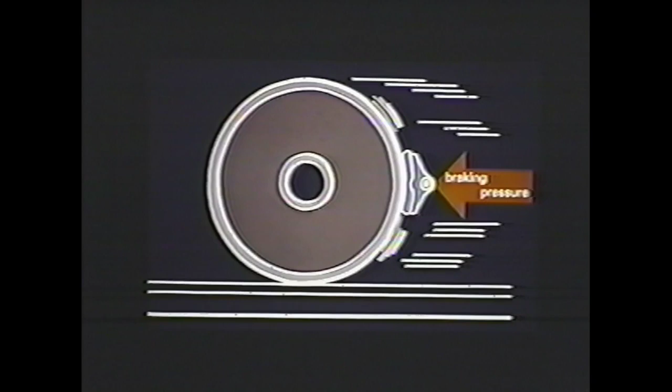Let's begin with the final result, the action that causes the wheel to slow down or stop. The most common method is to force a brake shoe against the rotating wheel at varying pressures.

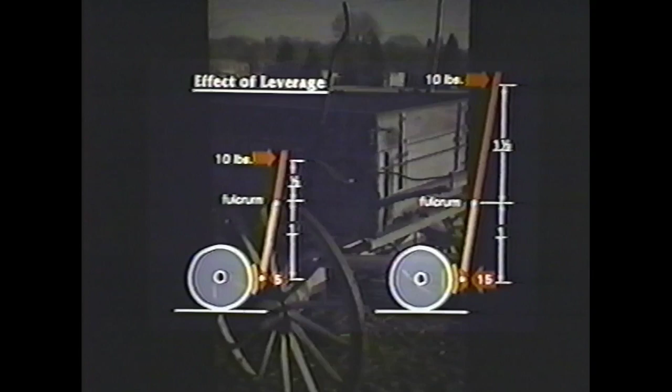During pioneer days, brakes were operated manually by a simple lever. When force was exerted at the top of the lever, the shoe at the bottom was pressed against the wheel. Notice that moving the fulcrum point or changing the length of either end of the lever affects the pressure on the wheel.

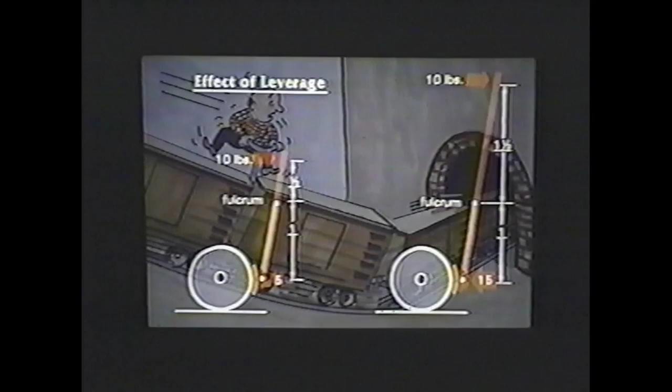In the early days of railroading, train brakes were applied by hand. When the engineer wished to slow the train, he blew a signal with the engine whistle. The brakeman, hearing this signal, would go from car to car, over the top, applying hand brakes. Another whistle signal told them to release the brakes.

In the late 1860s, George Westinghouse devised a way of forcing the brake shoe against a wheel by using air pressure. The air pressure acted against a piston that moved inside a cylinder. The piston movement was then transmitted through a rod and levers to the brake shoe.

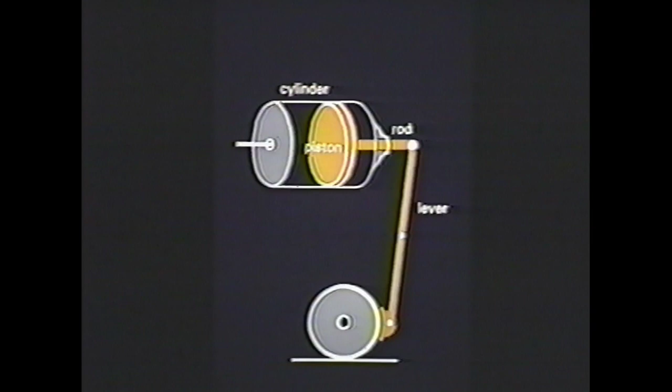George found that he could increase the brake force not only by levers, but also by increasing the piston area. If he doubled or tripled the area of a piston, he could double or triple the force on the brake shoe.

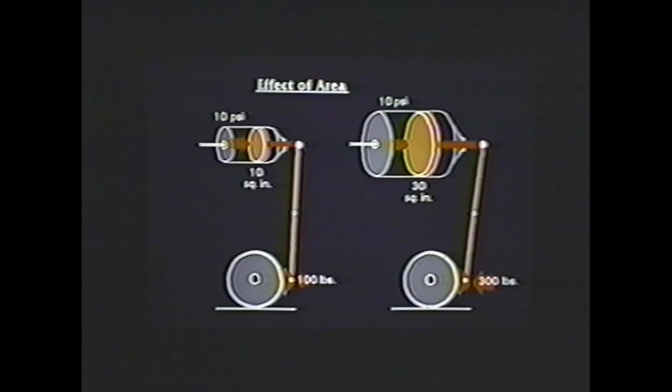This is caused by the fact that air pressure is exerted equally against every square inch of the piston surface. Increasing the number of square inches will increase the total force. We always state the amount of pressure in pounds per square inch, or PSI, instead of trying to determine the total force.

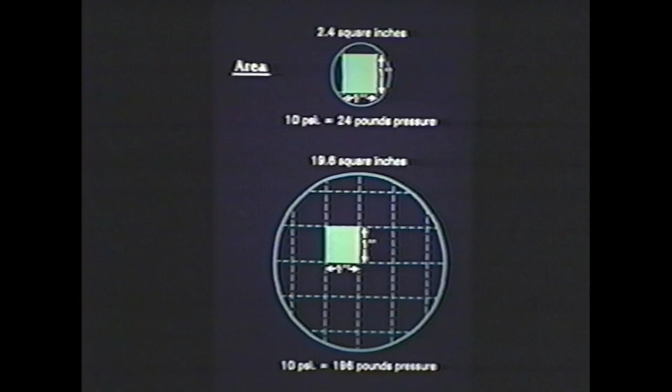George Westinghouse used these principles to build a train air brake system. He installed a steam-driven air compressor on a steam locomotive and connected it to a large tank or reservoir which held a supply of compressed air. He then connected the reservoir to a valve located at the engineer's position.

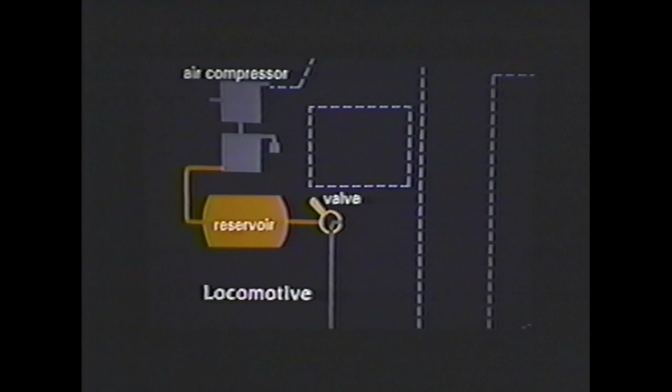When the engineer wanted to slow the train, he would pull back on the valve handle. This would allow air pressure to flow from the reservoir into a brake pipe. The brake pipe was connected to each car in the train through cocks, flexible hoses, and couplings. A branch pipe connected the brake pipe to a cylinder on each car.

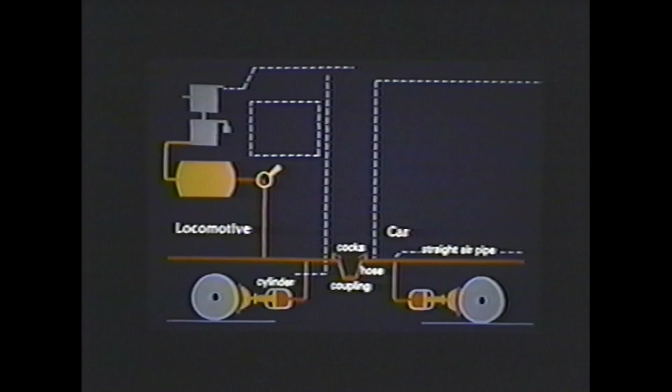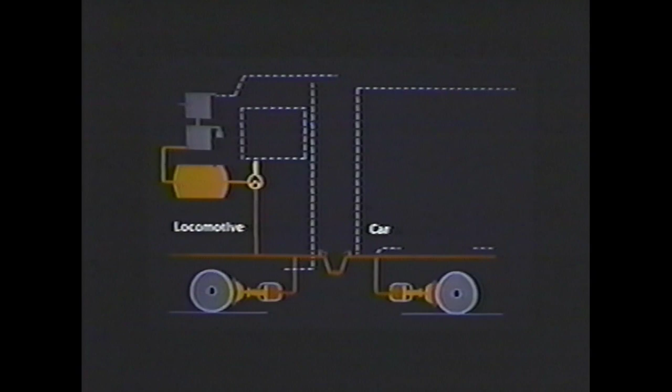When the engineer felt the braking force was sufficient, he would move the handle forward until the valve was closed or lapped. This held air pressure in the cylinders and kept the brake shoes against the wheels. To release the brakes, he pushed the valve handle all the way forward. This opened the brake pipe so that pressure could escape from the system.

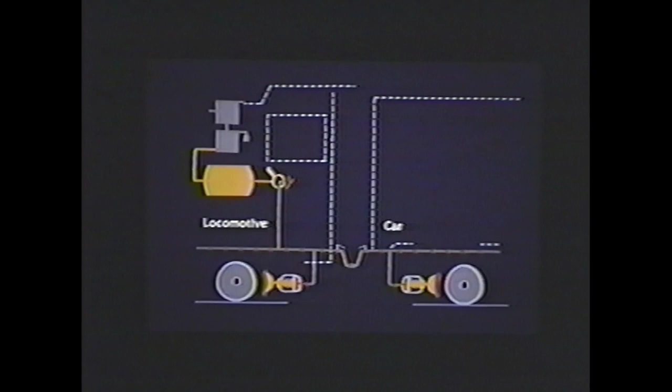When the air pressure was released from the cylinders, a light spring would push the pistons back, pulling the brake shoes away from the wheels. This system proved to be a big improvement over the use of hand brakes.

However, it wasn't long before a train separated. An air hose burst, or maybe the brake pipe was broken. Guess what happened then? No brakes.

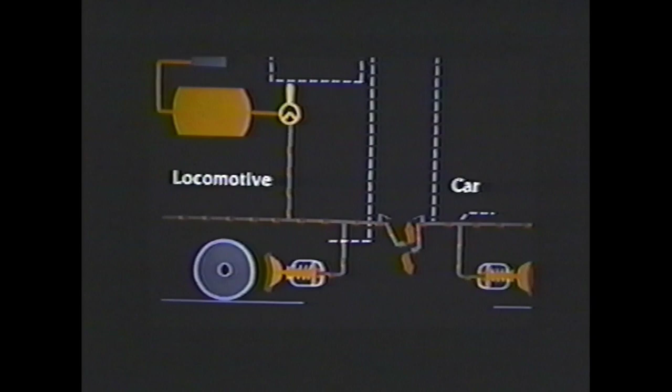Undaunted, George went back to the drawing board. In the early 1870s, he came up with a fail-safe system. By reversing the direction of airflow in the brake pipe, the brakes would apply automatically if the pressure should escape.

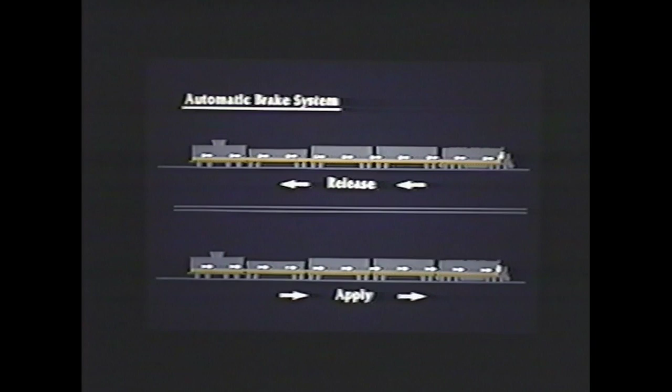This meant putting pressure into the brake pipe to release the brakes and taking pressure out of the brake pipe to apply the brakes.

In order for this system to work, George had to provide each car with its own supply of air pressure. So he placed a separate reservoir on each car, which was auxiliary to the reservoir on the locomotive. Then he designed a valve for the car, which would control the charging of the reservoir, applying the brakes and releasing the brakes.

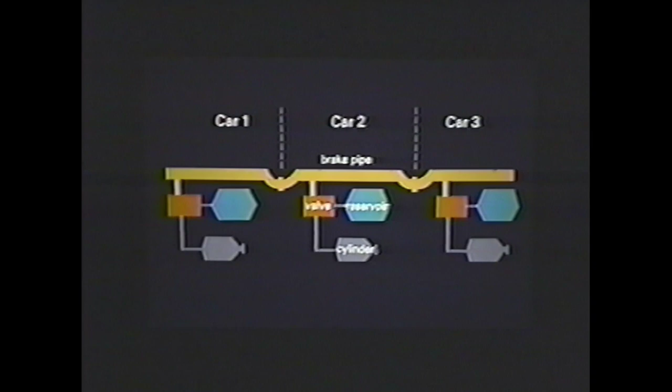The valve was the heart of the car brake system. On command from the brake pipe, it would perform these three distinct functions: charge, apply, and release. Because of this triple duty, the valve became known as a triple valve.

If we learn how the triple valve works, it will reveal the basic operation of today's complex control valves. Although many additions and refinements have been made, the principle remains the same. This knowledge can be helpful in avoiding pitfalls and solving many air brake problems.

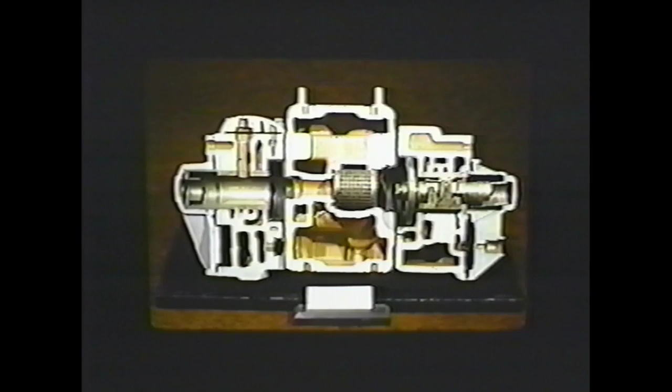The early triple valve was made up of a piston that moved back and forth in a cylinder. The piston had a stem attached to one side that moved a brass block, called a slide valve. As the slide valve was moved, it opened or closed connections to control airflow.

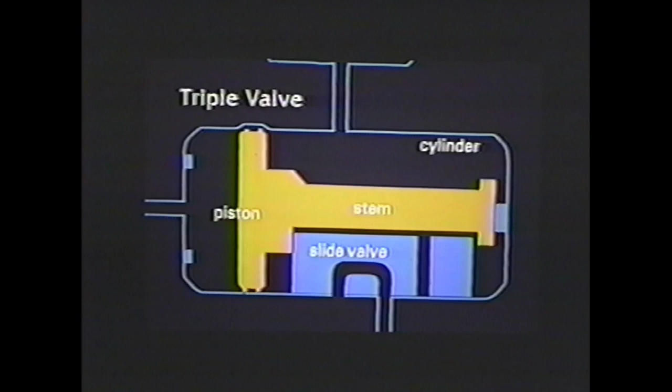The chamber to the left of the piston is connected to the brake pipe. As pressure enters from the brake pipe, the piston is pushed to the right, moving the slide valve.

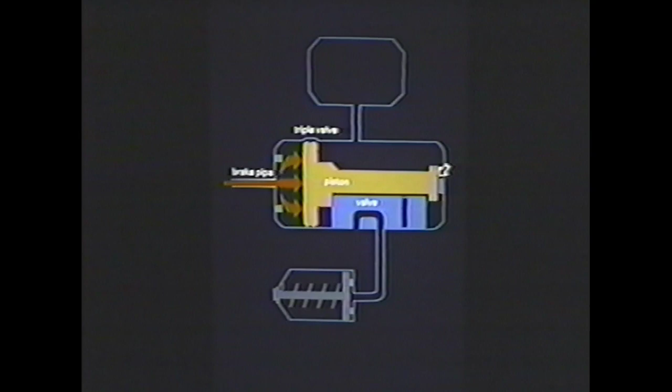When the piston is pushed to the right as far as it will go, a small passage called a charging port is uncovered above the piston.

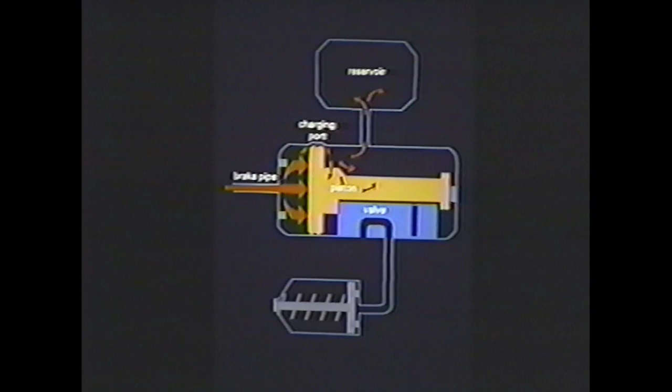Air pressure from the brake pipe can squeeze through the charging port to the other side. The pressure then begins to build up slowly around the slide valve and up into the auxiliary reservoir. Air pressure will continue to flow through the charging port as long as brake pipe pressure is higher than pressure on the other side. Because of the small opening, it will take about 7 or 8 minutes to build up to that in the brake pipe.

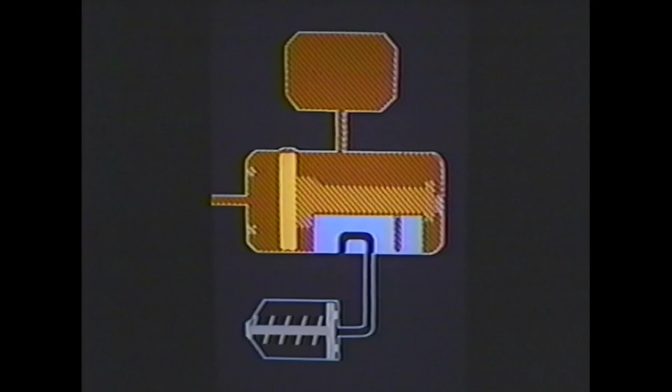When pressures are equal, the system is fully charged. Let's charge this system to 80 pounds. If we maintain 80 pounds pressure in the brake pipe, it will slowly build up to 80 pounds around the slide valve and in the auxiliary reservoir. Now we can apply the brake by reducing pressure in the brake pipe.

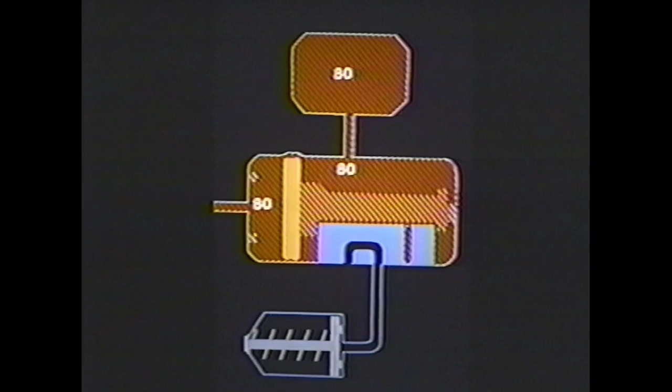Suppose that we reduce brake pipe pressure 10 pounds, from 80 to 70. As pressure begins to drop on the brake pipe side, the piston will start moving to the left. This movement is caused by higher pressure pushing against the right side. The charging port is so small that pressure cannot flow back through it as fast as brake pipe pressure is being reduced, and the first movement will close off the port.

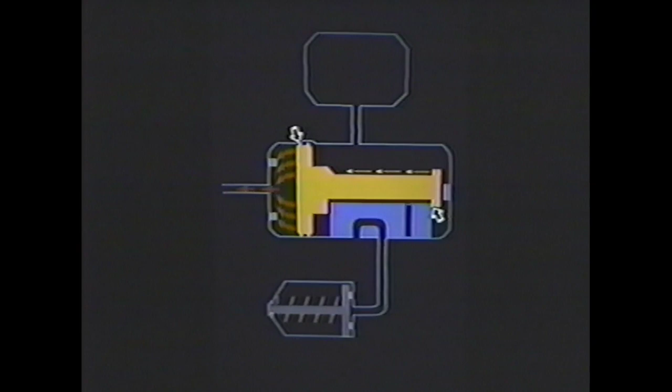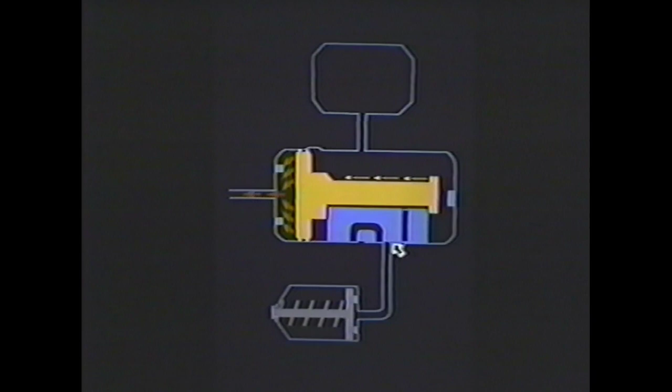As the piston moves further, the slide valve is pulled along to close the exhaust opening from the brake cylinder, shown by the arrow. With reduced brake pipe pressure, the piston continues to move all the way to the left. In this position, the hole drilled through the slide valve will line up with the pipe connected to the brake cylinder. Now, air pressure from the reservoir and around the slide valve can flow down to the brake cylinder to apply the brake.

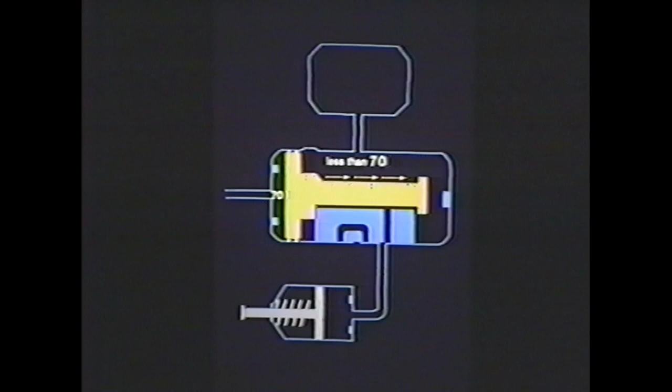As air pressure flows from the auxiliary reservoir to the brake cylinder, reservoir pressure is reducing. This flow will continue until the reservoir pressure is slightly below the 70 pounds remaining in the brake pipe. When the reservoir pressure is slightly lower than brake pipe, the piston will move toward the lower pressure, or toward the right. This movement continues until the slide valve is moved far enough to close the opening to the brake cylinder. When all ports are closed, the valve is said to be lapped, and the brakes will be held applied.

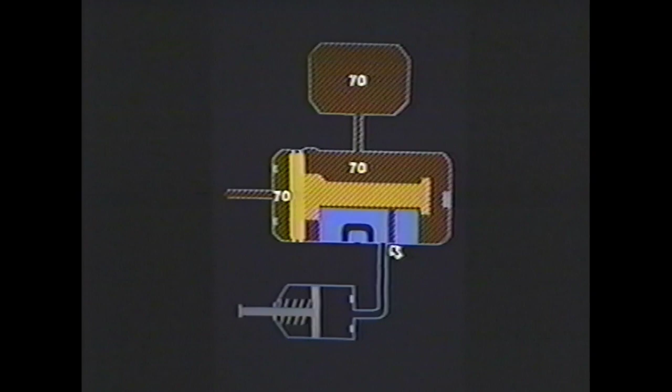If we wish to apply the brake harder, we can make a further reduction in brake pipe pressure. Each reduction causes the piston and slide valve to move, opening the port to allow more reservoir pressure to flow to the brake cylinder. In this way, we can apply the brake in small steps or graduations.

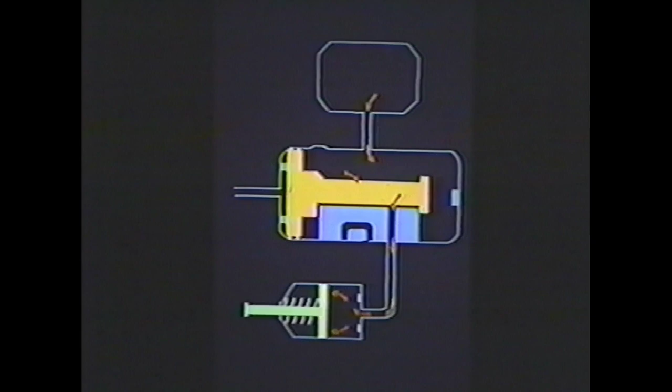To release the brake, we must increase brake pipe pressure. When the pressure on the brake pipe side of the piston becomes greater than that remaining on the reservoir side, the piston and slide valve will move toward the right. Now, all air pressure in the brake cylinder will exhaust through the slide valve, and the return spring will return the brake cylinder piston to release.

One thing you should note here: once the valve moves to release, all brake cylinder pressure will be released. The brake cannot be released in steps or graduations.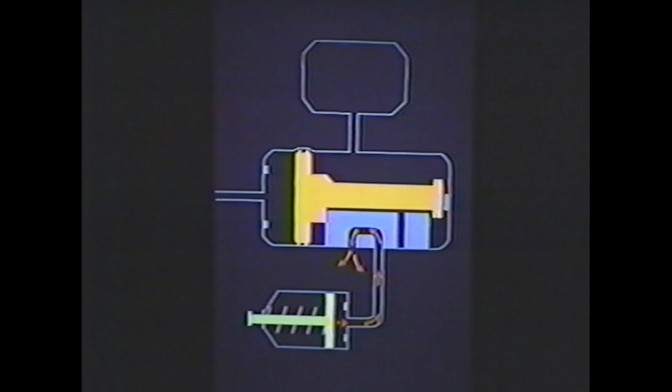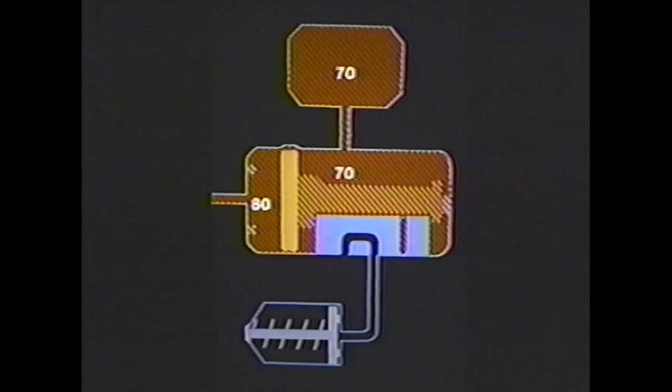Another important fact to remember: brake pipe pressure will increase quite rapidly, but auxiliary reservoir pressure will increase very slowly. Here we see that brake pipe pressure already has reached 80 pounds, but reservoir pressure has only recharged to about 70 pounds. If it were necessary to apply the brake again at this point, we would get no brake cylinder pressure until after brake pipe was reduced more than 10 pounds.

This is the fundamental principle of train air brakes. The brakes will release when brake pipe pressure is above auxiliary reservoir pressure. The brakes will apply when brake pipe pressure is below auxiliary reservoir pressure. This principle can help you understand and solve many air brake problems.

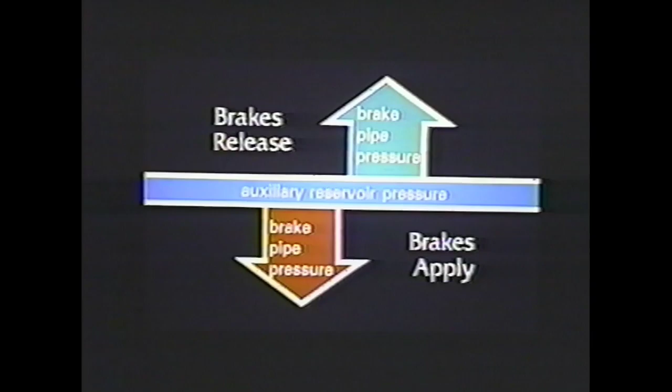There are two methods by which the valve can be moved to release position: either increase brake pipe pressure or reduce auxiliary reservoir pressure. All control valves are now equipped with a reservoir release valve. By pulling part way out on the rod, reservoir pressure will be reduced and the brake will release.

Up to this point, we have not discussed the pressure developed in the brake cylinder when the brake is applied. To understand this, we must first learn a few facts about the brake cylinder.

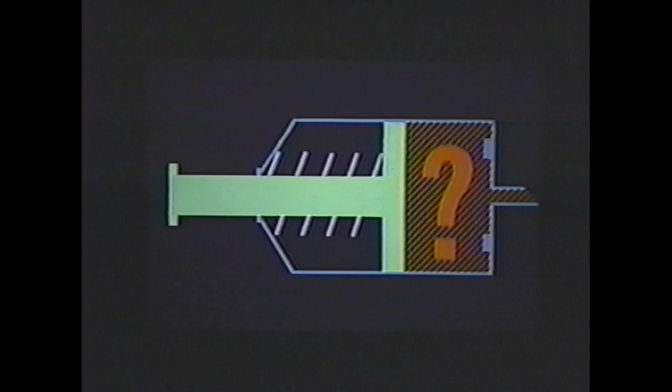When there is no air pressure in the cylinder, the piston and rod are held to the right by a light spring called a return spring. The action of the return spring pulls the brake shoes away from the wheels when the brake is released.

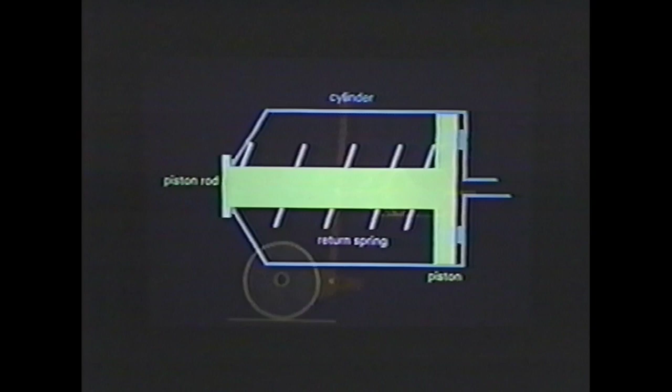When the brake is applied, air pressure enters the cylinder and soon overcomes the spring. The piston and rod move toward the left until all brake shoes are up tight against the wheels. The length of movement will depend on brake shoe wear and condition of the levers and pins.

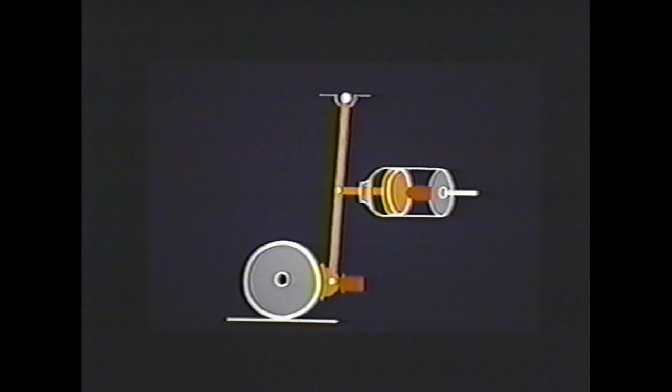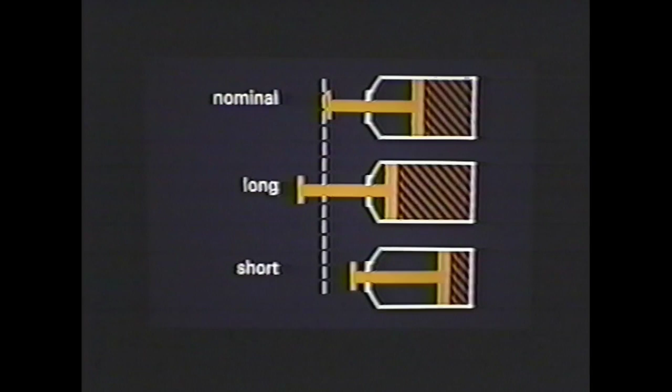Brake cylinders are given a nominal piston travel, the point where the piston should be when the brake is fully applied. This point determines the space or volume that must be filled with air pressure. If the piston travel is longer than nominal, the volume will be larger. If the piston travel is shorter, the volume will be smaller.

When the piston is at its nominal travel, the volume in the auxiliary reservoir is just 2½ times larger than the volume in the brake cylinder. This 2½ to 1 ratio can be used to determine the brake cylinder pressure.

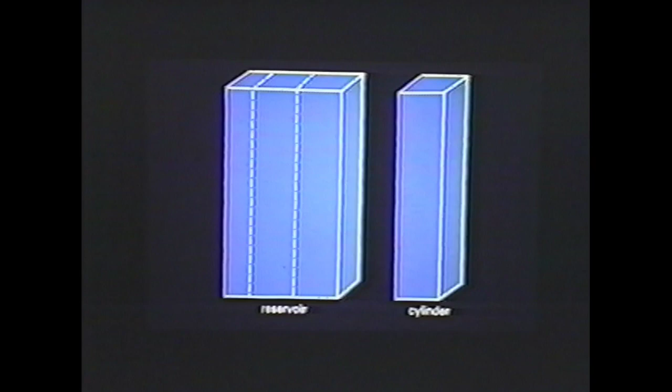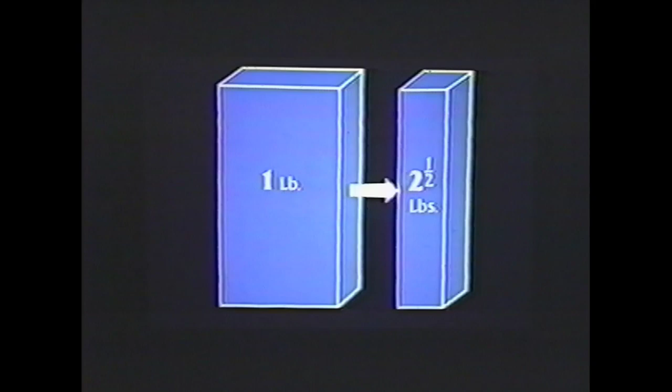We found earlier that for each pound of brake pipe reduction, a pound of pressure would flow from the auxiliary reservoir to the cylinder. Now we shall see that each pound of pressure from the reservoir becomes 2½ pounds in the brake cylinder. This can be seen more clearly by using two water tanks.

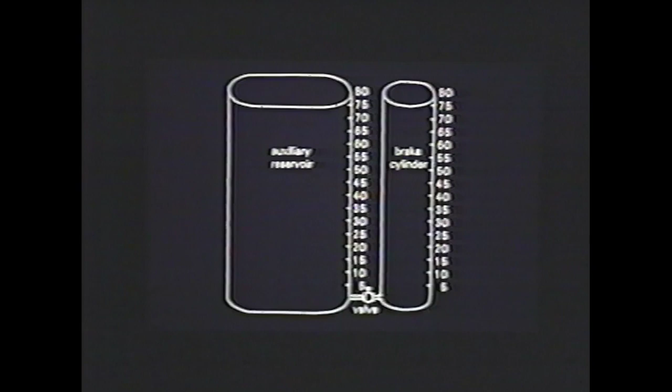The larger tank represents the auxiliary reservoir. The smaller tank represents the brake cylinder. Each is 80 inches high. Now suppose we connect the two tanks at the bottom through a valve, and the valve is closed. Let's begin with the large tank filled to the top, indicating that the reservoir is fully charged. The small tank is empty, indicating that the brake is released.

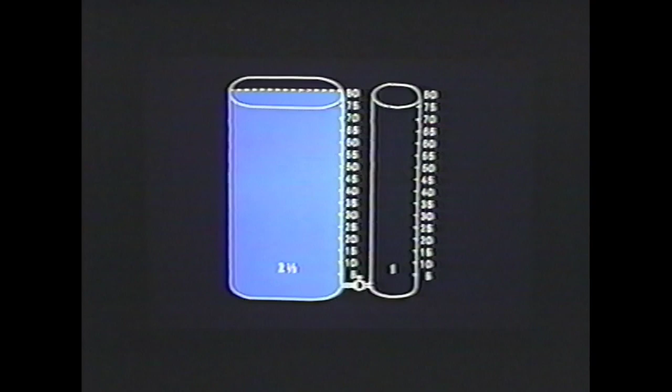If we open the valve between the tanks, water will flow from the large tank to the small tank. As the water level drops down in the large tank, it comes up in the small tank. Let's close the valve when the water level has dropped 10 inches in the reservoir. Now we can see it has risen 25 inches in the cylinder because of the 2½ to 1 difference in volume.

Each time we open the valve, water level drops in the reservoir and rises in the cylinder. There will be 2½ inches added to the cylinder for each inch of drop in the reservoir. Here we see that the reservoir has fallen to 60 inches and the cylinder has risen to 50 inches.

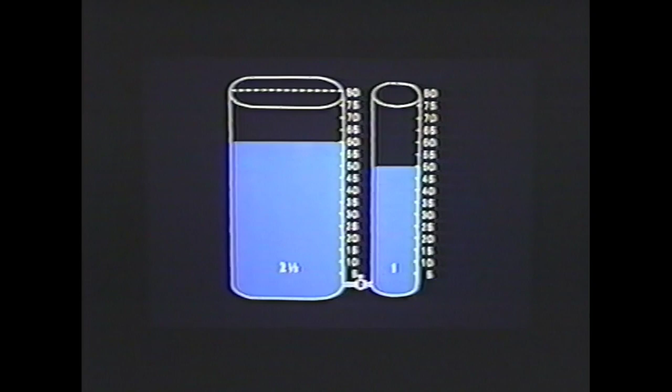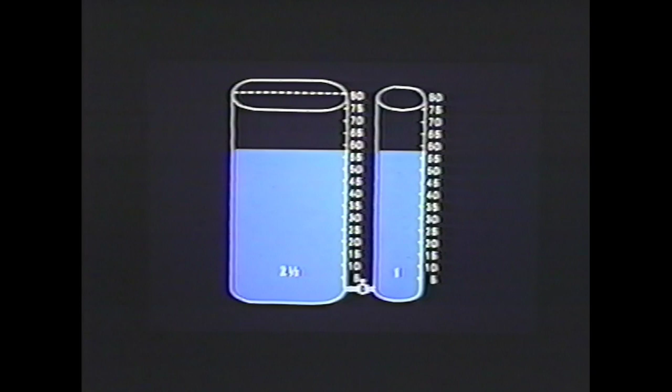This brings us to another important fact. What would happen if the valve were left open? When the reservoir drops to about 57 inches, the cylinder will increase to about 57 and the levels will be equal. No more water will flow between the tanks. This point is called equalization. Equalization is the point at which reservoir and cylinder are at the same level.

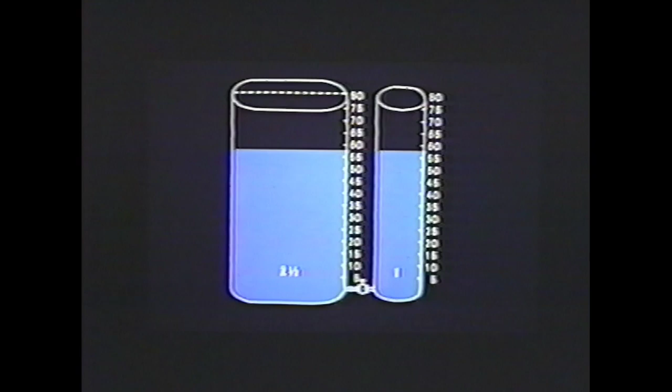In air brakes, equalization is the highest amount of braking that can be obtained during a normal application. This is true because only one reservoir, the auxiliary reservoir, is used normally.

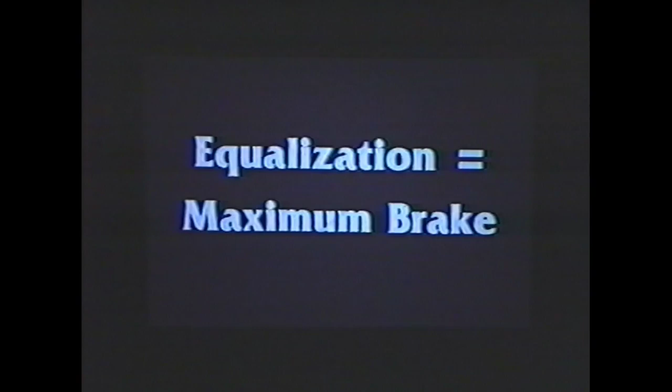To get stopped quicker in an emergency, a second reservoir had to be added to each car. The second reservoir, called an emergency reservoir, is charged in the same manner and to the same pressure. However, it is not used during normal braking.

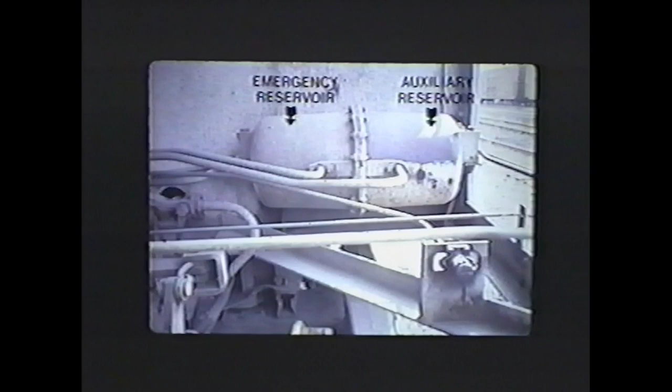When an emergency stop is required, both reservoirs, auxiliary and emergency, are equalized with the brake cylinder, providing a 20% increase in brake cylinder pressure.

The control valve must now be able to recognize a normal application from an emergency application. Since the pressure must be reduced in the brake pipe to cause an application, somehow the reduction will have to signal for either a normal or emergency application.

The solution was to devise an additional valve that would respond only when emergency applications were needed. Normally, the engineer exhausts air pressure from the brake pipe slowly. But in an emergency, he exhausts the pressure rapidly. The valve designed to make this distinction was called a quick action valve.

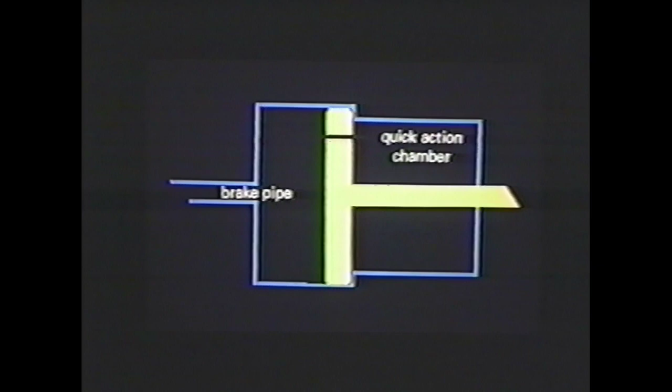Its operation depended on air pressure flowing through a small hole or choke, shown here in the piston. The quick action valve is charged similar to the triple valve. But when brake pipe pressure is reduced at a normal rate, the pressure flows right back through the hole, and the piston does not move.

However, if the brake pipe pressure is reduced rapidly, pressure cannot get through the hole as quickly as the brake pipe is reducing, and the piston will be moved to the left.

The piston movement will cause several things to happen. First, it will open a vent valve to dump all air pressure out of the brake pipe. Second, it will connect the emergency reservoir to the auxiliary and brake cylinder, raising cylinder pressure about 20%.

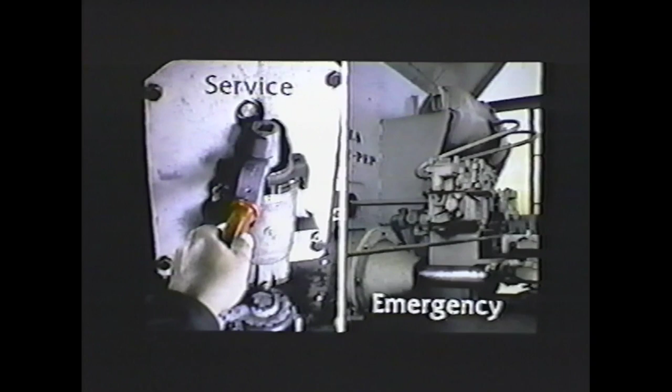If the small choke becomes clogged, air pressure cannot reduce in the chamber at the same rate as brake pipe. This can cause brakes to apply in an emergency when a normal or service reduction is made. This condition is often referred to as a kicker or dynamiter.

Remember, it's not the amount of air taken out of the brake pipe that triggers an emergency. It's the rate at which air pressure is reduced. That's why train brakes can be put into emergency when opening an angle cock too quickly.

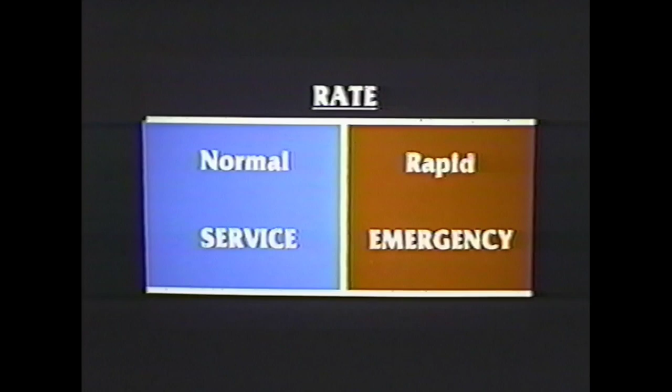After an emergency application, the brake pipe cannot be recharged, nor can the brakes be released until all vent valves have closed. This usually takes about 90 seconds.

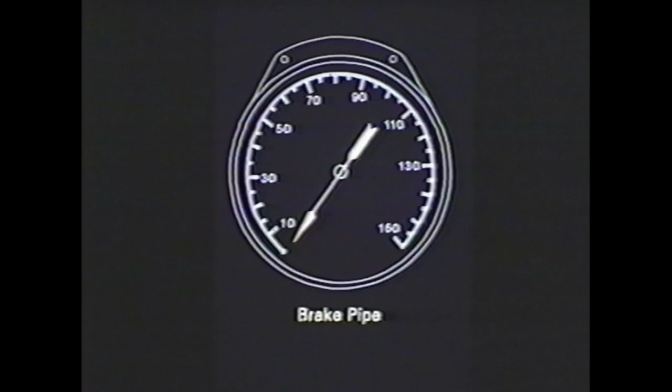Modern control valves, now called AB valves, have many improvements over the old triple valves. The service and emergency portions have been separated to improve stability. Features have been added to transmit both application and release of brakes more rapidly throughout the train.

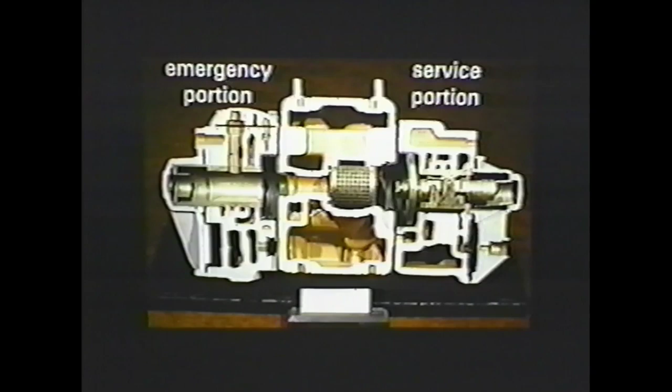One such feature is called quick service. The quick service feature makes a small reduction in brake pipe pressure at each control valve when a service application is first started. It helps to transmit or propagate the application throughout a long train, and it ensures that each car in turn will have the brakes applied once an application is started.

Improvements were made in the original AB valves, and they became ABD valves. A feature added to the ABD valve is the accelerated service release. This feature causes a faster release of service applications by allowing the unused emergency reservoir pressure to help build up brake pipe pressure.

Now, when brake pipe pressure is increased only a pound or so on the first car, the valve will assist in building up brake pipe pressure so that the next car will release and each car in turn adds air to the brake pipe.

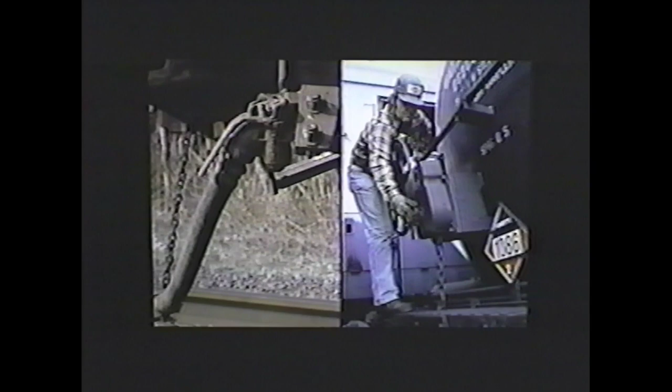This feature has caused the brakes to release on a few standing drafts of cars, resulting in runaways. To avoid such consequences, it is important that the brake pipe be completely depleted and an angle cock be left open on any drafts that are not attached to a locomotive. If this is not done, the cars should be secured with hand brakes.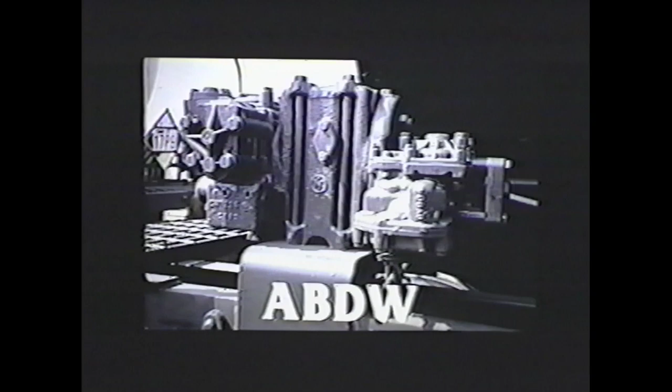The most recent control valve is called an ABDW. This valve has an accelerated service feature, which causes service applications to travel faster throughout the train. It is similar to the quick service feature, but acts continuously whenever brake pipe pressure is being reduced.

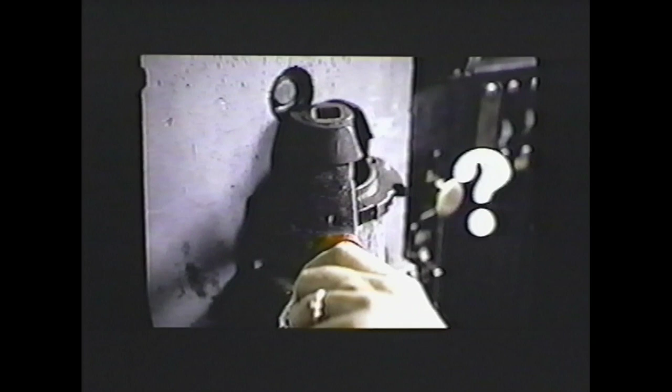The presence of ABDW valves in a train will cause a shorter brake pipe exhaust when making service reductions. An engineer can easily mistake this for a closed angle cock or an obstruction in the brake pipe.

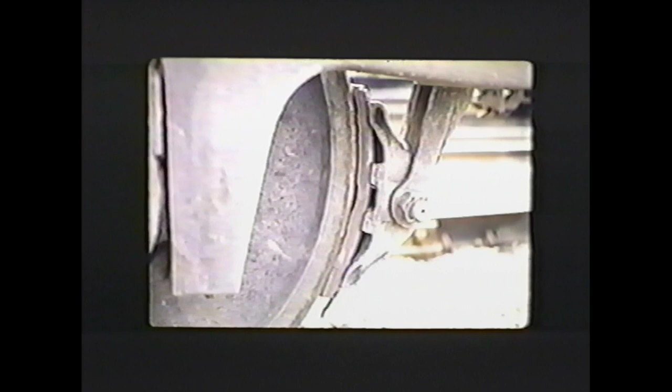Now let's look at some of the problems that can occur with car brakes. We said at the beginning that the purpose of a brake system was to force the shoes against the wheels. That's how we must determine if a brake is working or not, by checking to see if the shoes are against or away from the wheels.

Brake failures can be easily classified into two categories: either they fail to apply or they fail to release. If the brake fails to apply, check the brake cylinder first. If the piston is extended out, the problem is in the rods and levers or the brake rigging. They may be bent, broken, disconnected, or fouling.

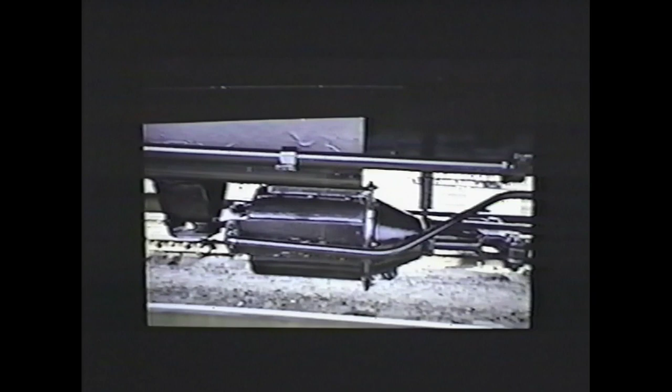If the piston is not out, the problem is in the air system. Make sure the reservoirs have had time to charge sufficiently. Remember, the air must first be stored in the reservoirs before it can enter the cylinder. And remember also that brake pipe pressure must be reduced below that in the auxiliary reservoir before the valve will move to apply the brake.

If the reservoir has not been allowed to charge sufficiently, don't keep trying to apply the brake. Wait a reasonable time for charging. The reservoirs are charged only while the brake is in release.

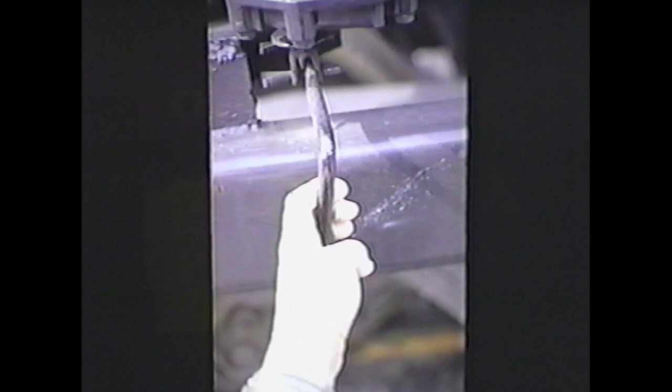A quick way to tell if the reservoirs are charged is to give a tug on the reservoir bleed rod. If a strong blast of air pressure is obtained, the reservoirs are charged. If it's only a weak blast, they are not charged enough.

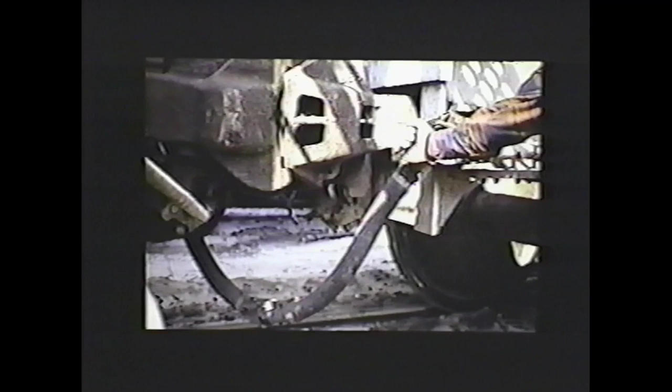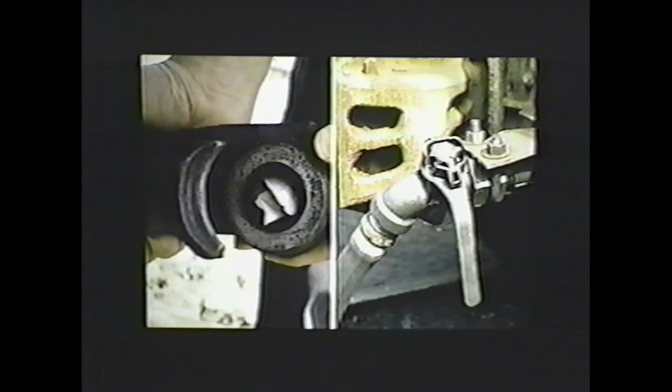If it appears that the reservoirs are not being charged, check to see that there is air pressure in the brake pipe. Check that all hoses are coupled between cars and the angle cocks open. Be sure there are no obstructions in the hoses, such as kinks, dirt, ice, and so forth. And check the angle cock on the end of the draft or train to see that it's closed.

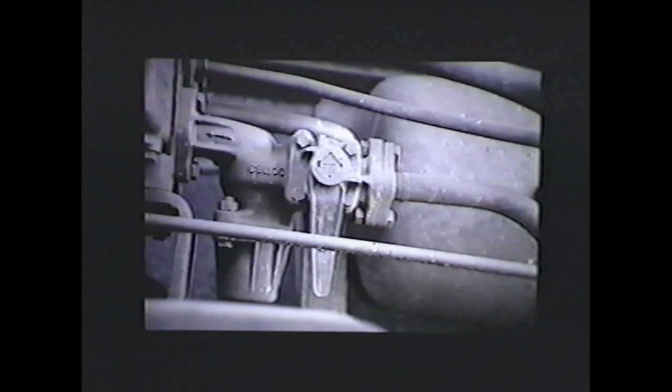Check the cutout cock in the branch pipe just ahead of the control valve. It must be open. This cock works opposite to the angle cocks. When the handle is in line with the pipe, the cock is closed. The handle should be at a right angle or crosswise to the pipe to be open.

If the brake is applied but fails to release, check the handbrake first. After releasing a handbrake, always check the shoes to see that they are away from the wheels. The chain may be caught or the rigging fouled.

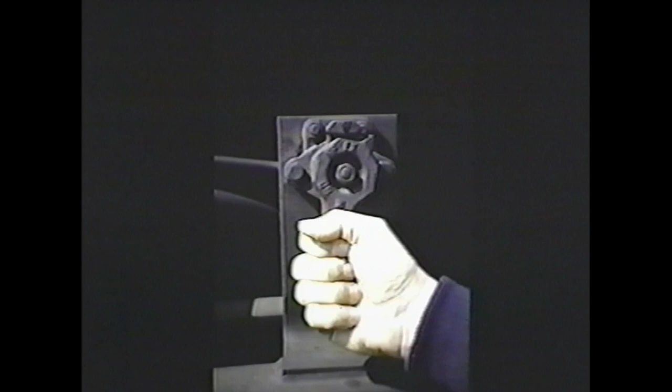If the retainer valve handle is turned up, the brake will not release. Make sure the handle is in direct exhaust position, pointed straight down.

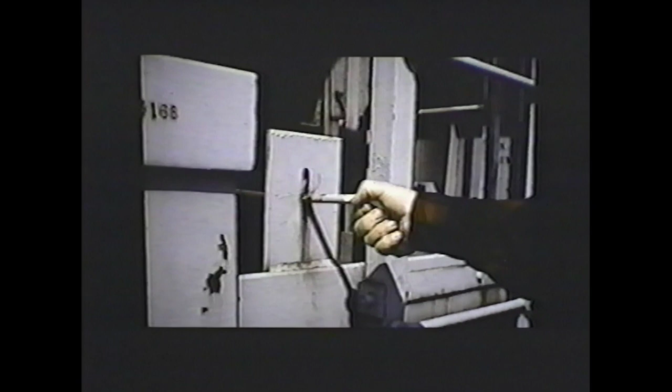Another problem that frequently prevents a brake from releasing is an overcharged reservoir. This can easily be corrected by releasing some pressure from the reservoirs with the bleed rod. Pull the rod out fully to release air from both reservoirs. If this succeeds in releasing the brake, make another application and release to be sure that it was just an overcharge.

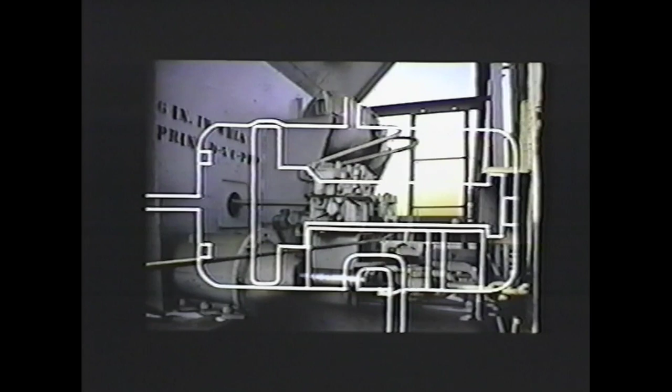There are many problems like these that can be corrected easily, on the spot, without tools. But it requires a basic knowledge of how the air brake system works. Although it cannot be seen, there is nothing mysterious about it. The secret is simple. Diaphragms or pistons move because the pressure on one side is higher than the pressure on the other side.